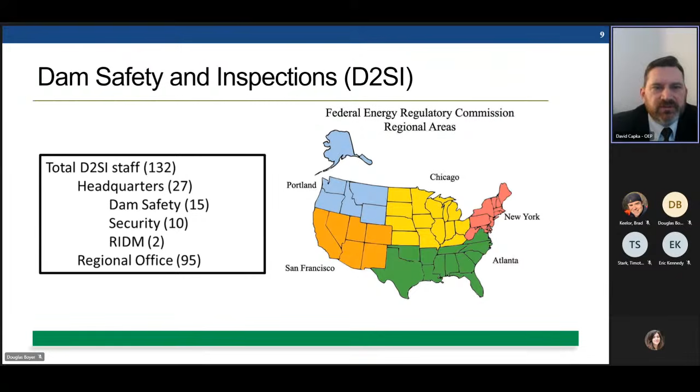So we are spread across the U.S. We have 5 regional offices to cover the projects in the various areas of the country. The Northwest is covered by the Portland Regional Office. The Southwest is covered by San Francisco. The Midwest, Chicago. The Southeast, Atlanta, and then the Northeast is our New York Regional Office. We also have a headquarters staff comprised of 15 dam safety technical experts. We have a security branch that is relatively new, responsible for the security of the projects that we regulate, also located within headquarters. And Doug's group, the risk-informed decision-making branch, is also located within the headquarters organization. We have a staff of approximately 130 engineers and geologists across the U.S., and most of the staff are in the regional offices, as you can see from the numbers there.

So our responsibilities are broken up between the headquarters and the regional offices. Headquarters provides programmatic oversight, the review and approval of independent consultants, which is going to be a major discussion today. We do have technical experts in the headquarters office to provide assistance on unique and difficult projects across the U.S. It also provides updates to regs and guidelines like we're talking about today. And of course, we have responsibility for responding to congressional inquiries and managing budget.

The regional offices are the boots on the ground. They're the folks that do the field work for us. They do annual dam safety inspections of our high and significant hazard projects and triennial inspections of low hazards. They also perform construction inspections when we have projects, either new construction or rehab construction. There are EAP exercises that they'll attend, and they review all the submittals that we require within our program. They also participate in the annual or 5-year Part 12D inspections and potential failure modes analyses.

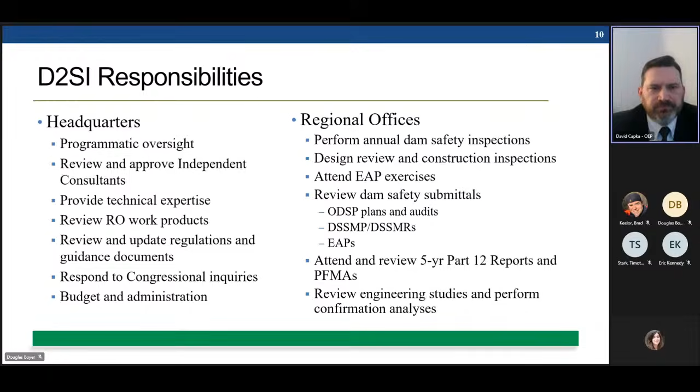So here's a snapshot of our inventory of projects. We have over 2,500 dams that we regulate. Of those, over 800 are high hazard potential projects and 200 plus are significant hazard. The rest are low hazard. For those of you who aren't familiar with the hazard potential classification, high hazard projects are those that if they were to fail, we would expect loss of life.

Significant hazard projects are those that if they were to fail, we would not expect loss of life. However, we would expect significant economic damage or environmental damage. Then the low hazard projects are ones where if they were to fail, the impacts would mainly be to the facility itself and the owner of the facility.

We've got a wide variety in our portfolio of projects that we regulate, from Oroville Dam, the tallest dam in the U.S., to dams you may not even notice unless you're looking for them. We do have some in the 4-foot high range. Our dam owners range from large utility companies who own up to 145 dams, down to individual citizens who happen to have a dam that generates electricity. So there's a wide range in our licensees, and it does provide challenges for us to regulate with respect to the different scale of ownership.

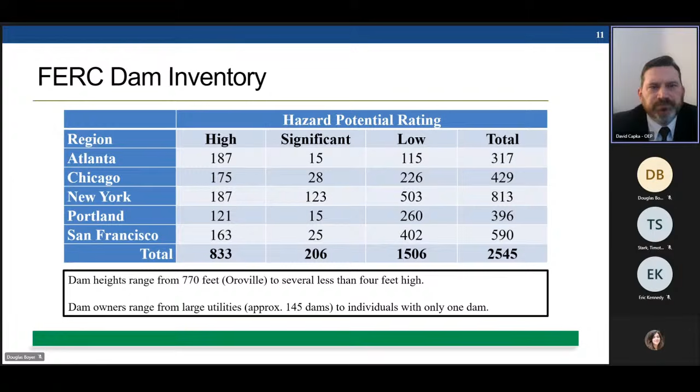So we've got some snapshots of some projects across the U.S. that we have regulatory authority for. These include concrete arch dams and concrete gravity arch dams in the inventory.

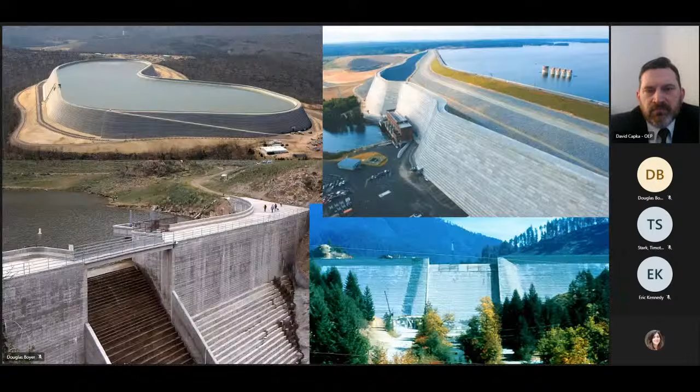We've got roller compacted concrete dams in our inventory, including pump storage projects.

We've got embankments, large embankments in our inventory, and you can see geographically it's all over the place. We don't have projects in every state, but we do have projects in almost every state.

And then we've got some large concrete dams, gravity dams, and you can see some of them have a lot of gates that have to operate during high inflows. So those projects vary tremendously, with a lot of different features, different sizes, and just a lot of different issues to focus on, inspect, address, analyze. It really keeps us busy, keeps the consultants busy.

Along those lines, I don't know who came up with this - it was before I came to FERC - but someone developed the Dam Safety Triad, which is how our program functions. The licensee, the owner of the project, is ultimately responsible for safely operating and maintaining the project. But as part of our program, we require independent consultants to be part of the mix, and they perform engineering services and inspection services on a lot of our projects. And then, of course, our staff are part of that as well. We're the regulator. We have responsibility to ensure that the licensees are implementing the requirements of our program effectively. We do that through inspections, independent analyses, and those sorts of things.

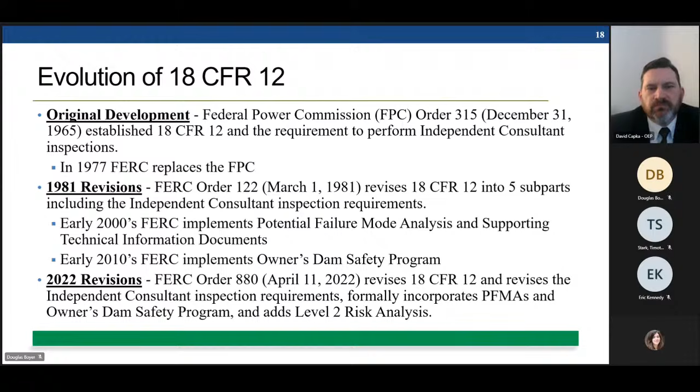So one question would be why did we decide to change? Well, it's been 40 years since the last major changes to the CFR occurred. So over 40 years, there were definitely some things that needed to be brought up to the current state of the practice. We have plenty of observations from over the years. There are on average 150 Part 12 inspections performed at FERC projects each year, so there's a lot we learned over the years that we thought could be improved.

Then in 2017, the Oroville spillway incident occurred in California, and following that we had the independent forensic team report, and also a FERC after action panel report, which provided recommendations for improvement within the Part 12 program, part of what we're pushing for here. We also wanted to incorporate the periodic updates from the PFMA process, the ODSPs, that we felt needed higher visibility by becoming part of the regs.

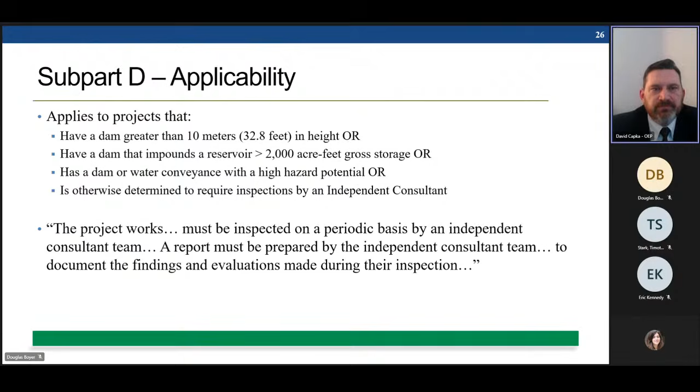So the existing program is that we have a 5-year cycle of the Part 12D independent consultant inspection. It includes document review, field inspection, PFMA, and then report preparation.

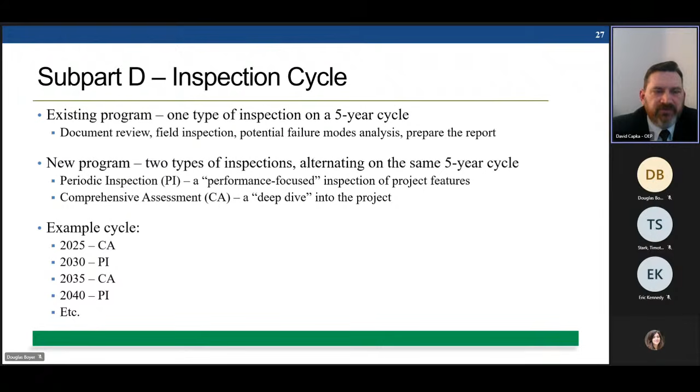The new program is going to have 2 types of inspections alternating on the same 5-year cycle. The first type is what we're terming periodic inspection, PI. That's going to be a performance-focused inspection of the project features. And then the comprehensive assessment, or CA, is going to be the deep dive into the project. Each of those will be done on a 10-year interval, alternating every 5 years. So the example cycle shown is what we'd expect for a typical project, who may have a comprehensive assessment due in 2025, and then a PI would follow 5 years later, then another CA 5 years after that, and so on.

We are changing the baseline standard for independent consultants to independent consultant teams. The independent consultant or consultants must be a licensed professional engineer and have at least 10 years of experience and expertise in dam design, construction, or investigation of safety of existing dams. Currently, we just require a single independent consultant to do the Part 12D inspections. We found that expecting a single person to be responsible for reviewing, inspecting, analyzing, assessing some of our projects is really asking too much. We've got a lot of projects with a lot of different, unique features to look at.

So we have decided that the baseline standard is that more than one person will be required to be on the independent consultant team. Now, it can consist of a single independent consultant with no additional team members - we do allow that. We have a lot of projects that aren't very complex or large, where one person actually can do a perfectly adequate job. But I think for the majority of our projects, we are going to expect teams, and the licensees are going to need to propose those teams.

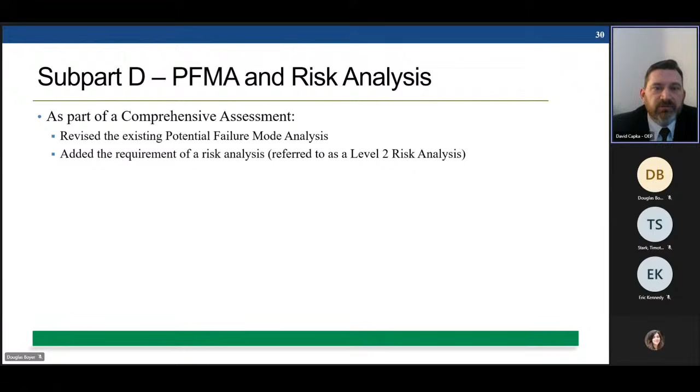And then as part of the comprehensive assessment, we are going to require the potential failure modes analysis, which we currently do - we are revising some of the details of the PFMA process. And then we're also adding the requirement of a risk analysis, which we're referring to as a level 2 risk analysis, and this is new to FERC. Up to now, we've just had a few pilot risk analyses performed in our inventory, but now, as part of our regulations, we are requiring risk analyses as part of the Part 12D inspection program. So every project that requires a Part 12D inspection is going to have a level 2 risk analysis as part of the comprehensive assessment.

We've also developed 4 engineering guideline chapters to get into the details of what we're looking for from the STID, from the Part 12D program, PFMA, and then the level 2 risk analyses.

With that, I'm going to turn this over to Eric Kennedy. He's going to talk about the Part 12D program. Thank you. Thanks, Dave.

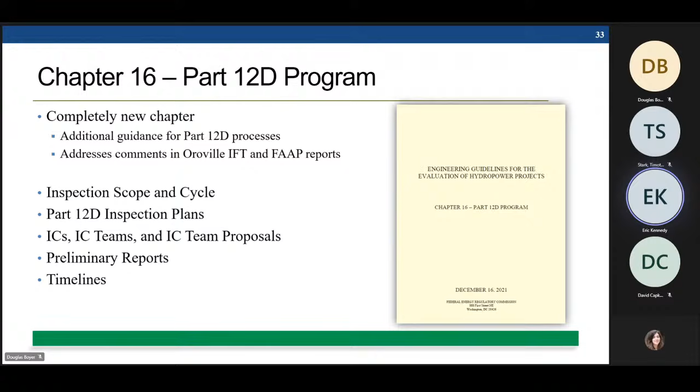As Dave mentioned, the changes to Subpart D were extensive. They required us to develop an entirely new chapter of engineering guidelines to support the regulations. Chapter 16 provides details on the topics listed on this slide and a lot more, and it helps address recommendations made by the Oroville Independent Forensic Team and the FERC Oroville After Action Panel reports. One important note: there's redundant information on purpose, so that anyone performing a CA can look at the guidance and outlines for a CA, and someone performing a PI can look at the guidance and outlines for a PI, without having to switch back and forth to figure out what applies to their type of inspection.

As Dave mentioned, periodic inspection is a performance-focused inspection of the project. The main goal is for an independent third party, not FERC or the licensee, to evaluate the performance of the project, and it'll typically occur 5 years after a comprehensive assessment. The scope includes review of relevant background material, a field inspection, review of instrumentation data and surveillance reports, evaluation of project performance with respect to identified potential failure modes, and review of other dam safety program elements such as hazard potential, EAP, etc.

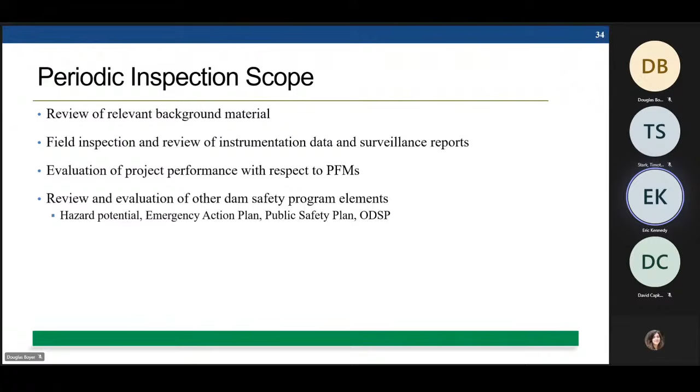The scope of a CA includes everything required for a PI, plus a detailed review and evaluation of the STID, the design basis, the construction of the project and any subsequent modifications, and the analyses of record. It also includes a PFMA, similar to the current program, plus a risk analysis, which is new. A CA will typically occur every 10 years, and the overall goal is to fully understand and evaluate the design, construction, and condition of the project, to take a fresh look on a periodic basis as the dam safety industry changes, as we learn more about how dams perform and fail, and as our dams age.

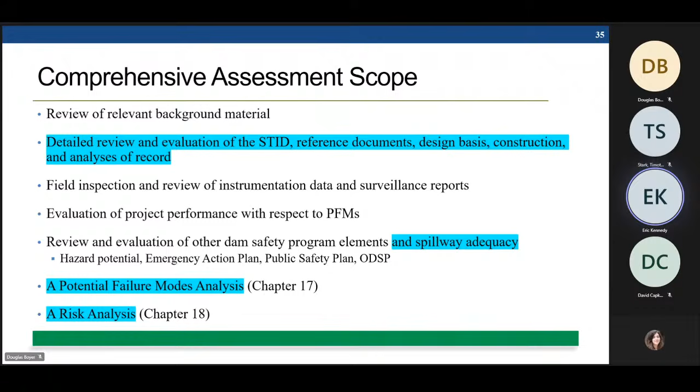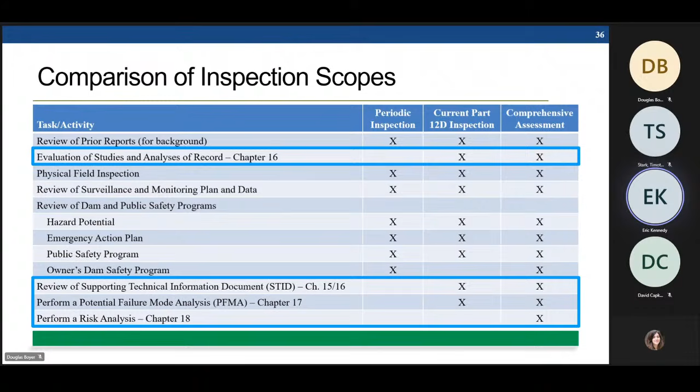This shows how the current Part 12D inspection, the one-size-fits-all approach, compares to the alternating scope for periodic inspections and comprehensive assessments. The major differences are outlined in blue boxes, but one thing to note is the evaluation of studies and analyses of record. While it is considered part of the current program, the requirements under a comprehensive assessment are much more detailed. Doug will later cover Chapter 17 and 18 on PFMA and risk analysis.

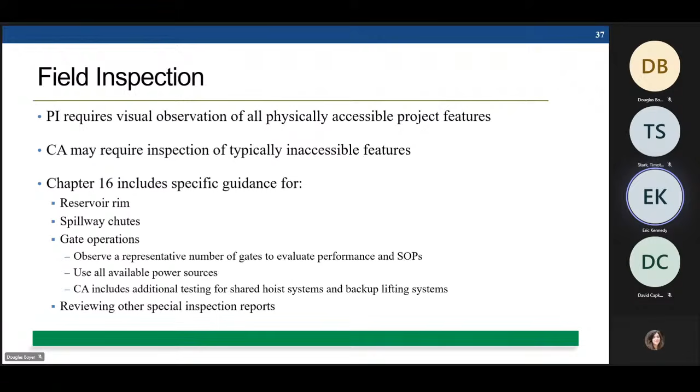For the field inspection, periodic inspection is pretty streamlined. It requires the IC team to inspect physically accessible project features. A CA is more of a deep dive, and can include inspection of typically inaccessible features, for example confined spaces or areas that require special equipment or extensive dewatering to access, which will be case by case for the project. The IC team is also required to review any special inspection reports by others and test operation of a representative number of spillway gates. One important point: the IC team cannot just rely on 'the condition has not changed' as justification for safety of any given project feature or observation. The IC team's evaluation of the project from their inspection has to stand on its own.

When evaluating performance, it's not just the physical field inspection, it also requires a detailed review of the instrumentation data and surveillance reports, more than just whether the behavior is the same as before. Chapter 16 provides a list of considerations that should be addressed for each project feature. To do this properly requires the IC team to understand and describe what each instrument means with respect to performance, to understand the behavior, and explain whether anything going on is of concern. Again, similar to field inspection observations, the IC team's evaluation has to stand on its own, as a defensible, standalone evaluation.

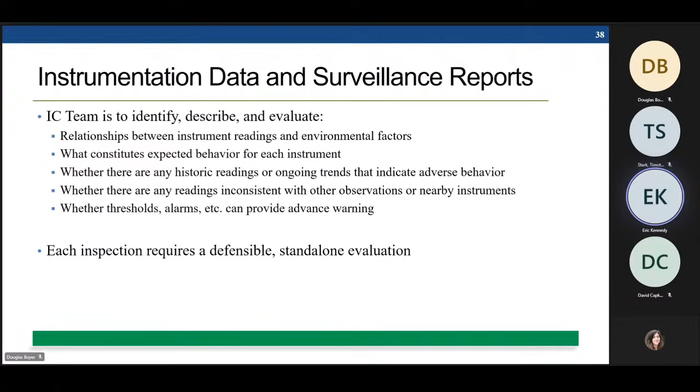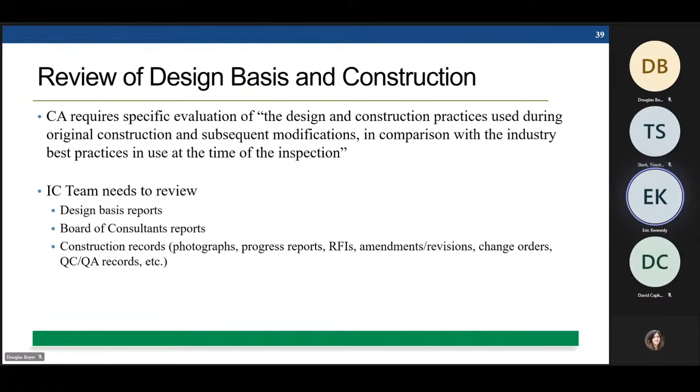So now I'm going to get into some of the components that are only for a comprehensive assessment. The CA requires specific evaluation of the design and construction practices used during original construction and subsequent modifications in comparison with the industry best practices in use at the time of the CA. The IC team needs to review historic documents such as design basis reports and construction records so that they understand the design intent and how the dam was built.

The reason for this should be fairly obvious. We do things differently now than we did 2, 3, or 4 generations ago. We place concrete differently. We design embankment dam filters differently. We do a lot of RCC nowadays, and it's different than the first ones that were built in the early 1980s. We've also learned a lot from dam failures and near failure incidents.

IC teams will need to understand how modern dams are built and how dams have failed so they can evaluate the previous practices and determine whether there are any potential concerns. The IC team also needs to understand the operational intent of the project and whether there have been any changes in operation that conflict with what the designers had in mind. For example, operating with a higher pool elevation or a different reservoir rule curve, or doing more frequent spillway operations for some sort of environmental mitigation. All of these could affect overall project safety.

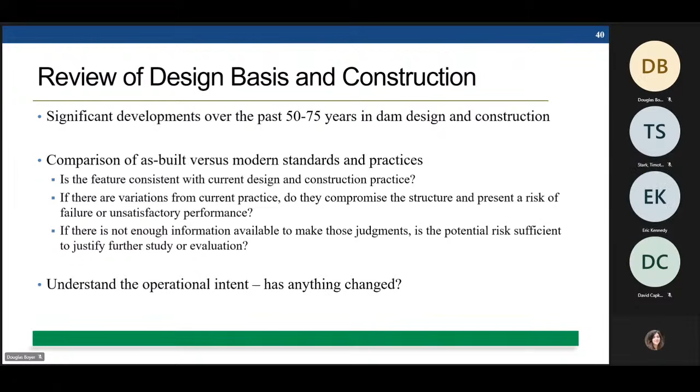The IC team also has to review the analyses of record. Examples are listed here and they're described in more detail in the guideline.

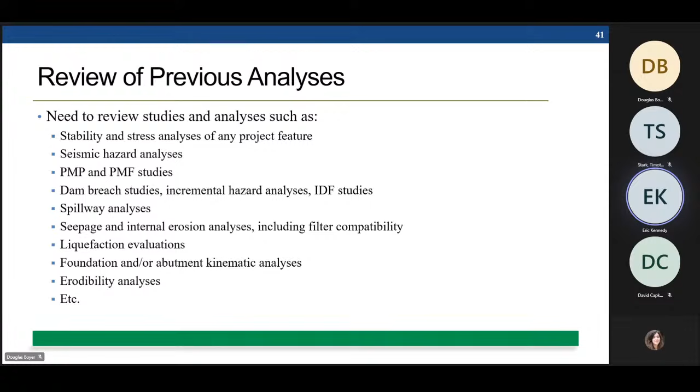The IC team's review of previous analyses is described in the regulations, and the IC team has to address the accuracy, relevance, and consistency with the current state of the practice of dam engineering. The IC team also has to provide sufficient documentation of their rationale, whether they're evaluating the analyses as being acceptable or requiring revision.

So what do we mean by accuracy, relevance, consistency with the current state of the practice? Accuracy is pretty straightforward: mathematical errors, invalid methodologies, inconsistent or incorrect parameters. We have had examples where we look back at a record analysis and there was a simple math error that, had it been corrected, would have completely changed our understanding of the safety of the dam.

Relevance is a little more complicated. It requires the IC team to evaluate whether the analysis was set up or done properly so that it could answer the question at hand. There's an example in Chapter 16, which is a numerical model that's set up to prohibit the failure mode from occurring. That wouldn't be relevant for evaluating the failure mode because it prohibits that failure mode from occurring. Use of an invalid methodology could also affect an analysis's relevance to the project.

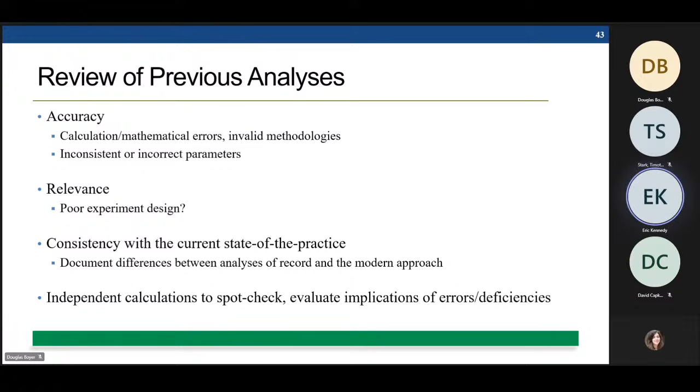Consistency with current state of the practice is similar to the evaluation of construction practices. Differences between the record analysis and modern approach need to be flagged and understood. In some cases, the IC team might have to complete some independent calculations as a spot check to evaluate whether differences between the current state of the practice and the analysis of record approach have significance with respect to safety of the dam. But we want to note that these types of independent calculations would not include the scope of creating your own finite element analysis.

I think Doug's going to get into the scope of a PFMA and risk analysis shortly, but from everything Dave and I have said already, it should be obvious why we need an IC team. For a comprehensive assessment, it's a lot of work, and it's really difficult to imagine one person being able to handle all of that on their own. Now, for a periodic inspection, it's more likely that a single IC might be able to handle it on their own. But the way we're going to evaluate it is whether the IC team collectively has the experience and expertise to get the job done.

Now I'm just going to show a couple of quick examples. Both of these dams were shown earlier, and you might be able to imagine that the IC teams for either a PI or CA would look very different. The dam on the left likely needs some structural expertise specific to arch dams, maybe a geologist, and maybe a gate specialist. The dam on the right could use a geotechnical engineer, maybe a hydraulic structures engineer for the spillway, and maybe a geologist. Either project might need a hydrologist or a seismologist, depending on how current or critical those studies are, or perhaps an instrumentation specialist.

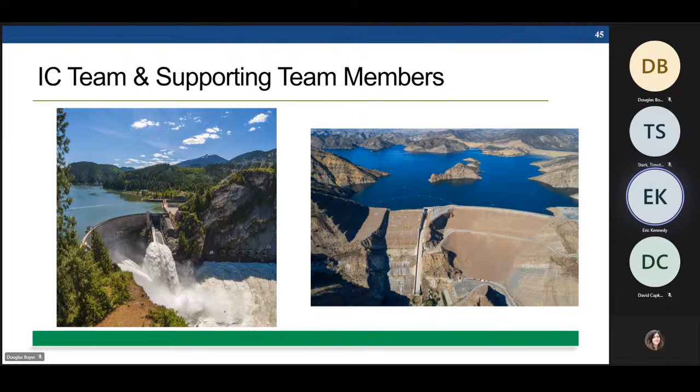I'm just going to quickly cover Chapter 15. It provides guidance on the supporting technical information document and the digital project archive.

Just as background, the supporting technical information was rolled out in the early 2000s with the original PFMA process. It was included as part of Chapter 14. Over the past 20 years, we've realized how critical the STID and the reference materials are to our periodic evaluations of dam safety, so now it's its own full chapter. The title, which includes the Digital Project Archive, or DPA, emphasizes the importance of having all the original source documents available for review. The Oroville IFT report noted that the STID for that project may not have been complete and didn't contain all the references it should have. A CA requires that the IC team review the STID and DPA to ensure they're complete.

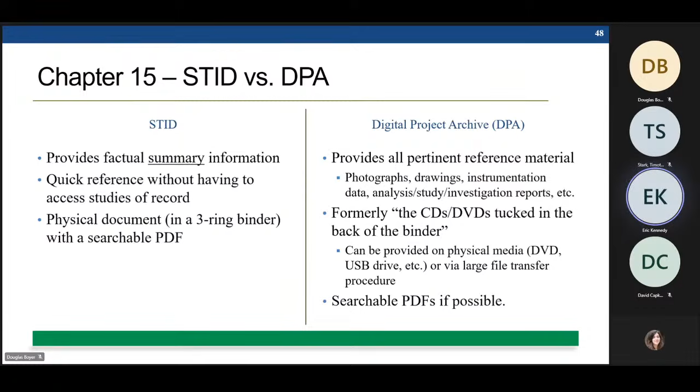Hey, thank you very much, Eric. I'm just going to spend a little bit of time to talk about the contents of Chapter 17, which is on the potential failure mode analysis, as well as Chapter 18 on the risk analysis. For those familiar with our prior guidance, PFMA, potential failure mode analysis, was included as part of Chapter 14 of our engineering guidelines. We've separated that out, given it its own chapter, and made some revisions based on the thousands of PFMAs we've actually conducted since the early to mid 2000s, from the comments and recommendations included in the Oroville Independent Forensics Team report, as well as comments and recommendations from the After Action panel from Oroville and the public comments we received from the draft version published as part of the NOPR back in July. We got a lot of good comments from that as well, so we wanted to incorporate those into the guidance.

So just to try to highlight some of the significant revisions in Chapter 17 to the potential failure mode analysis process - I'll go through each one on a slide or two coming up, but just to give you a sense: we'll talk about identification of the required technical disciplines, not unlike what you've heard from Dave and Eric prior, to make sure we're having the right technical inputs, the right expertise on each project, needing team members that have that kind of expertise to be able to function. We'll talk quickly about revised definitions of failure and how that's changed. Understanding how the project operates and functions is very important, and again something that was highlighted in the Oroville IFT report, as well as being able to incorporate human and organizational factors in our thinking as far as how we actually develop, identify, and evaluate potential failure modes. And we'll talk a little bit about brainstorming of potential failure modes, how we've tried to structure that process, including how we now screen for failure modes, as well as some documentation process.

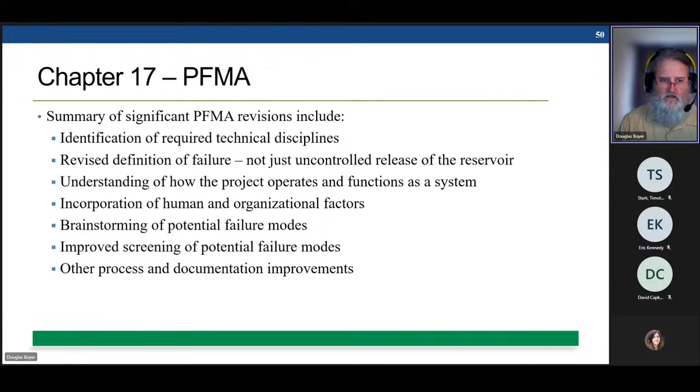Okay, so we'll take each one of those separately and talk a little bit more about those. Again, I'm hoping that what you're hearing from Dave, Eric, and myself is this hopefully consistent theme about needing to make sure that we have the right expertise for each project, based on the technical disciplines that folks have, depending on the features that the project has and the kind of issues or concerns that might be related to the project.

Something that was hammered home quite appropriately from the Oroville IFT report: Chapter 17 talks about what kind of team expertise and disciplines might be required, and identifying the roles and responsibilities of the different folks participating in the potential failure mode analysis. That includes a facilitator and co-facilitators, subject matter experts digging in and developing failure modes based on their technical expertise, the importance of a note taker or recorder and the experience they should have, as well as other participants.

There'll typically be other folks at a potential failure mode analysis who might not fulfill one of these previous roles, but still might be there as an observer or casual participant, someone providing additional supplemental information. So Chapter 17 tries to provide some discussion of team member qualifications for each one of those roles on the PFMA team.

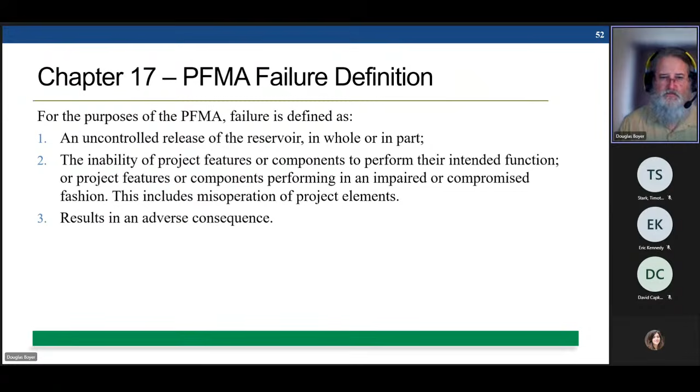In addition, to better understand the scope and approach of a potential failure mode analysis, it's imperative to understand not only the project features, but how those features actually function as a system - those interactions, relationships, and dependencies of the physical and operational elements of the project, to be able to put that in a systems context.

We try to emphasize that this understanding needs to happen prior to jumping into a brainstorming session to identify potential failure modes, to make sure all the participants of the PFMA understand all the different intricacies of the project - how water is released, how water is stored, what happens if a certain system goes down, the potential for backup systems and redundancies, operational protocols, the lines of communication important for the decision-making process, where feedback may or may not be available and what kind of feedback that might be, and the authorities and responsibilities of all the operational and project personnel.

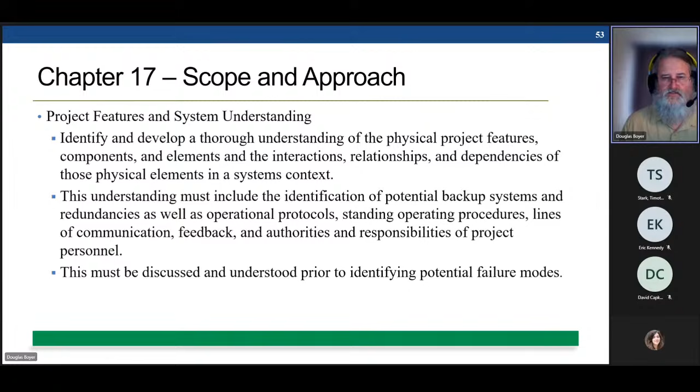So all of that understanding has to be understood up front to really be able to start thinking about potential failure modes and to understand those relationships and interdependencies.

We also want to include this discussion of human and organizational factors. Through a series of prior independent forensics team reports, this topic has come up more and more, in the understanding that yes, these projects have failed or had an incident with some type of physical manifestation, but oftentimes, almost always, there's been some other human or organizational factor that has some type of impact or contribution to that particular failure.

As engineers, we may tend to overlook things like this because it's maybe not in our wheelhouse as much as the details of gates and other structures. But it may be those softer sides of things - understanding the organizational factors, how decision-making authorities and practices are actually implemented, how those are communicated, and how those have a potential to impact failure.

So we've included an appendix at a very high level at this point, to try to help guide folks performing the potential failure mode analysis on how you might take those types of items and incorporate them either in the descriptions of potential failure modes, or perhaps more likely, as less likely factors in evaluating a potential failure mode, to start thinking in that process and how that might be incorporated in our day-to-day thinking.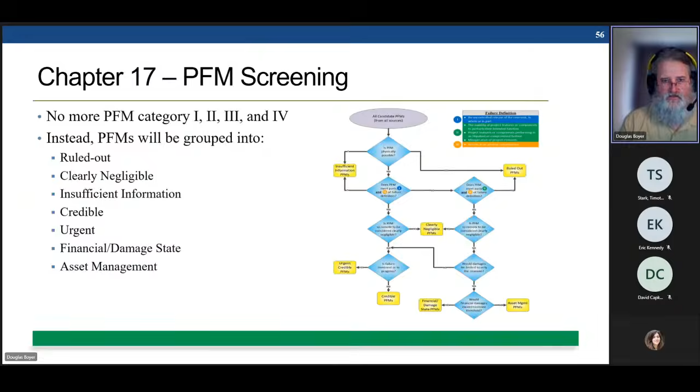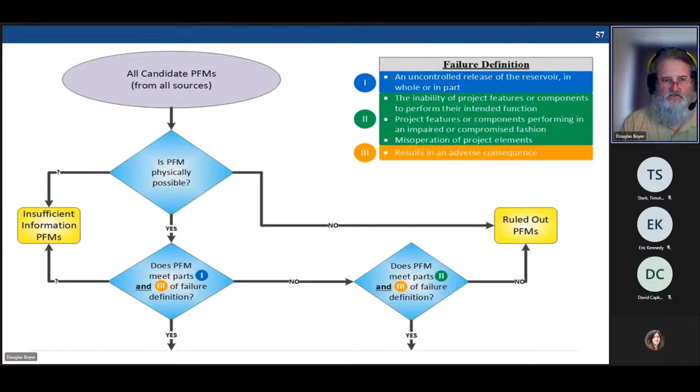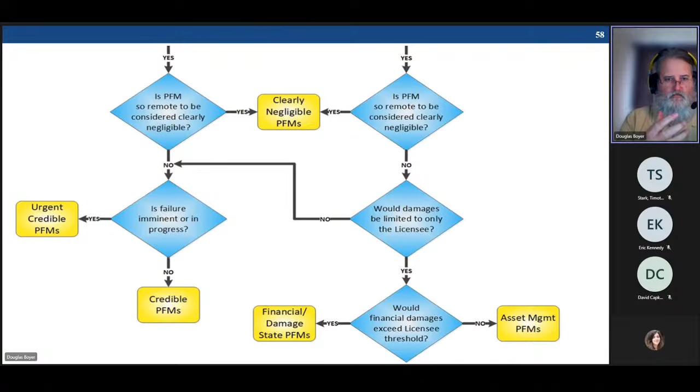So I realize you can't see this flow chart just on the screen, and I've tried to break it down a little bit for you here. It's based on the failure definition. We've tried to group kind of how you proceed through a flow chart like this, being able to come up with a disposition, a binning process for each one of the failure modes and how to consider that. I won't go into detail with that here, but just understand that there is a new kind of stepwise process to work through, so that it should be systematic as to where these failure modes end up, by asking oneself a series of questions going through this.

And then finally, in Chapter 17, we've tried to provide some suggested or potential templates and things like that to help with the potential failure mode analysis process, mostly to help ensure that things aren't overlooked, so that you can use the template to capture that kind of information. One can use that again to make sure something's not overlooked, as well as report outlines, example justifications for why one might exclude certain potential failure modes, what examples one might use as far as the actual words to justify those, and how summary tables of potential failure mode analyses or potential failure modes could be put together.

Moving on to Chapter 18. This is a new chapter for us in our engineering guidelines. This highlights a hole that we've had in our existing RIDM guidelines, our risk-informed decision-making guidelines published in 2016. This is the level 2 risk analysis that we've referred to in our guidance.

A level 1 being a much higher level, less sophisticated risk analysis that one might use for looking at an inventory of, say, common dams with one owner or something like that. The level 2 is one level more sophisticated, and we also have two other higher levels of risk analyses, level 3 and level 4, where we're starting to get into more quantitative type risk analyses and, quite frankly, less failure modes. These are more issue evaluation or issue-specific types of risk analyses.

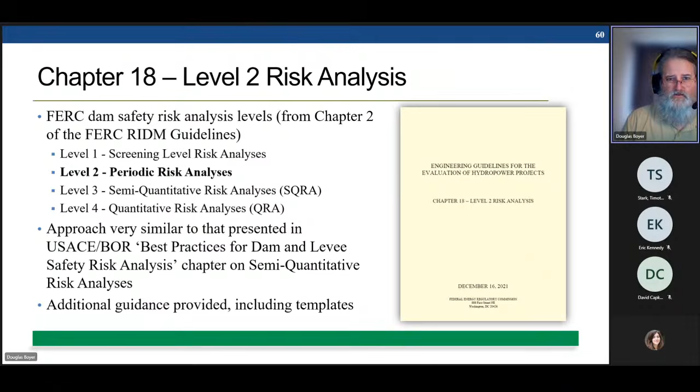So some of the templates and other guidance related to that - we wanted to define from our agency what risk measures we wanted to include in the level 2 risk analysis. It talks about qualifications of team members, how one might estimate the various loadings, an overview of the overall process from the level 2 risk analysis perspective, failure likelihoods and consequences and how those are estimated, how we would like those risks portrayed in a report, and finally the documentation. We'll cover each one of these in a little bit of detail to give you a sense of what that includes.

So Chapter 18 goes through the risk analysis measures and identifies those risk measures that we want to see in a level 2 risk analysis. That includes the life safety risk from a societal or incremental standpoint. That's the most common risk measure that most folks doing risk analysis are probably familiar with. But it also includes non-breach life safety.

That non-breach is estimated as if the dam actually didn't fail - it's actually performing its intended function. But even with the releases downstream, say during flood flows, that might have the potential to actually impact life safety associated with that. So it's important to understand and know where you might have actual non-breach life safety implications on each particular project, as well as annualized probability of failure, which is the third risk measure.

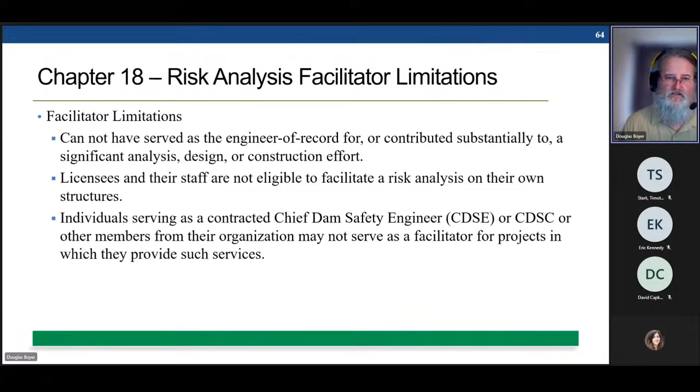So Chapter 18 goes into a high-level overview of probabilistic loadings. Again, these are quantitative estimates from the standpoint of the frequency of loading from a hydrologic as well as seismic loading. I think industry is probably better or more familiar with doing PSHAs, probabilistic seismic hazard analyses, than maybe from the flood aspect. But there are methods out there.

In industry, the Risk Management Center at the Corps provides some good documentation as far as how industry might go about that, the methodology and approach. We will be providing training on that as well, to try to help industry understand the expectations we have of being able to develop these probabilistic hydrologic hazards.

The other aspect of that, which industry probably hasn't had a lot of experience doing at this point, are the consequence estimates - namely life loss, human life loss from that. There are a number of different methods to be able to do that. We try to provide some guidance on when you might go with certain types of methodologies or approaches to do the consequence estimates, and it really is a project-by-project specific approach to be able to do that.

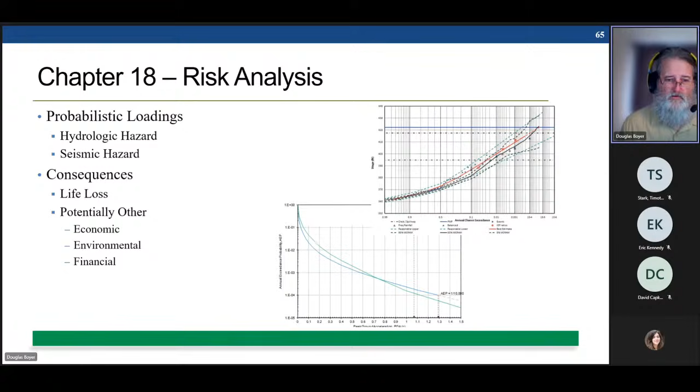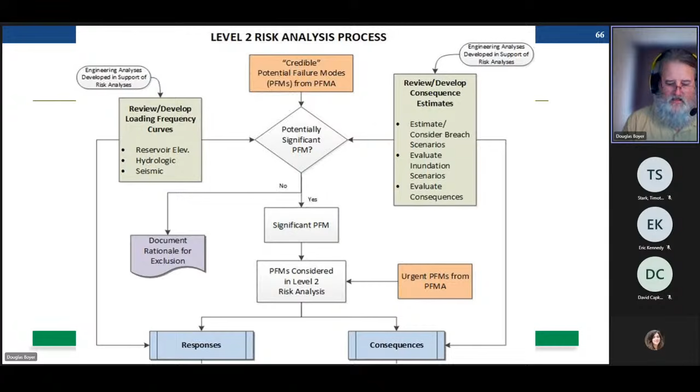Otherwise, it passes into the risk analysis, and using the information on the response and the consequences, you can develop estimates and likelihoods for each one, combining those to look at the risk itself, determine its confidence and uncertainty, identify any risk reduction measures or management activities one might consider to reduce the risk of that particular potential failure mode, and then how we like to have that plotted and documented in the report. So all that's highlighted in Chapter 18.

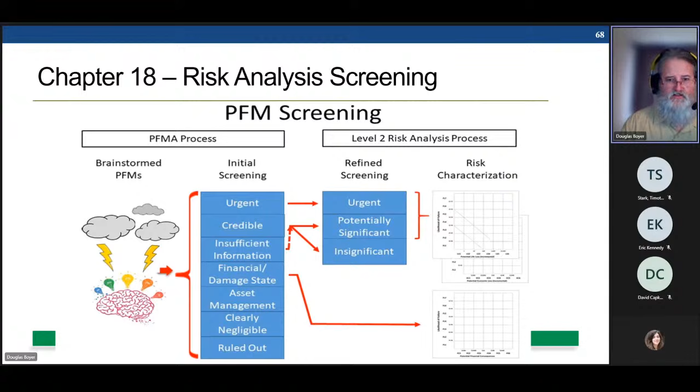Chapter 18 goes through the secondary screening process that occurs at the risk analysis phase. The left-hand side of this slide goes through the potential failure mode process, from brainstorming to the initial screening, and then taking those failure modes that at the end of the PFMA are credible and have insufficient information, to screen those again with the consequences and the likelihood and the probabilistic loadings, to see if those are actually potentially significant and whether they get carried into the risk analysis itself.

Chapter 18 goes into quite a bit more detail on the risk analysis failure likelihood approach, and how one might look at each failure mode differently, and what approach one might take to come up with failure likelihood estimates. Chapter 18 identifies three different ways one might approach developing failure likelihood estimates.

Other approaches include a critical load approach, which involves more explicit estimation of the annual probability of failure by looking at what critical load level might be appropriate - more appropriate for seismic and flood failure modes where you've got probabilistic estimates of the frequency. Finally, there's the quantitative approach, where one can use an event tree or fault tree or similar method, going through nodal estimates to develop your own likelihood of failure estimates.

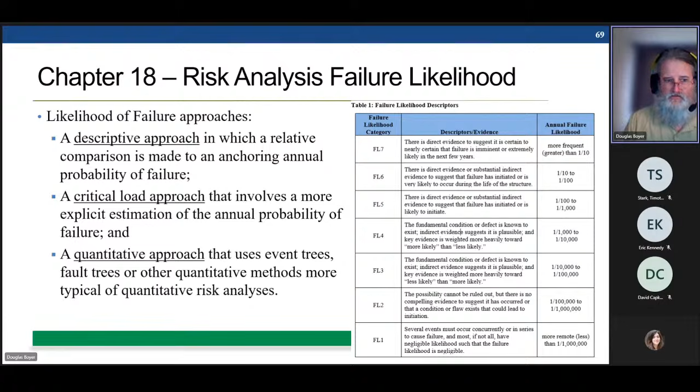And then the risk analysis and developing the life safety consequence estimates. There are 3 different approaches to this: a descriptive approach, an empirical approach, and a simulation approach that models life loss. For folks more familiar with simulation approaches, that might be something like a LifeSim or similar.

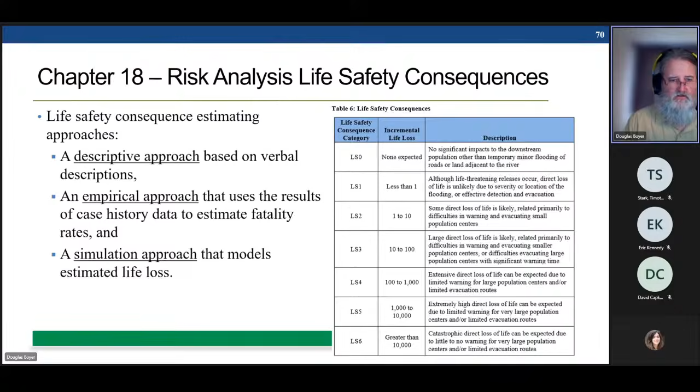That's included in Chapter 18, as is how we would like the risk analyses to be portrayed. There's a template there for each risk measure, whether it be life safety, non-breach, or probability of failure, and that's all provided, as well as a total for each of the failure modes that could be estimated from the process.

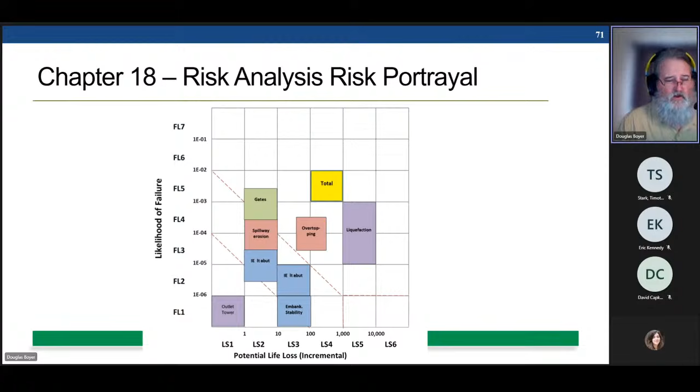And like the potential failure mode analysis in Chapter 17, Chapter 18 goes through appendices to provide report outlines and example justifications and templates to capture all the information that might need to be captured during a risk analysis process. And with that, I'm going to turn it over to Dave to talk about implementation and training.